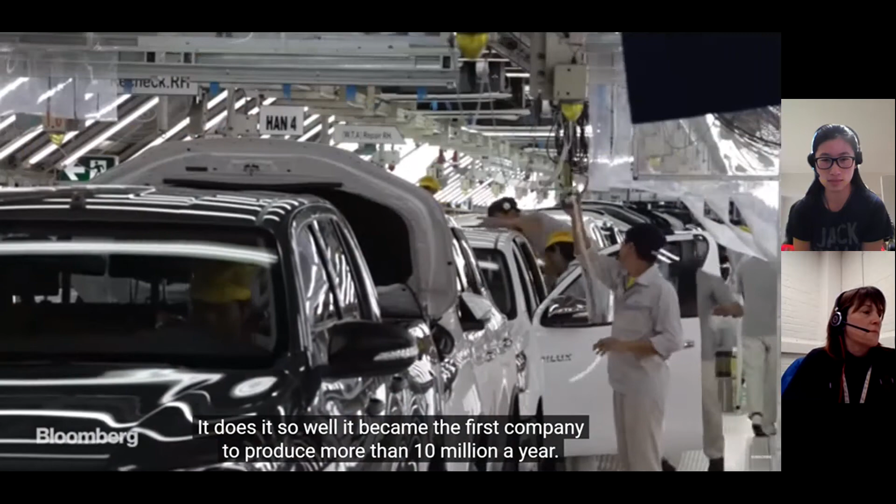Toyota knows how to make cars. It does it so well, it became the first company to produce more than 10 million a year. Its success is rooted in a special system and began what's now known as lean manufacturing, an ethos emulated by companies around the world to make products faster, cheaper and better. Here's how Toyota changed the way we make things.

Following the Second World War, Japan was left in a precarious economic position. Steel and other metals were scarce. Already disadvantaged by lacking natural resources, materials were hard to come by, and companies had to be creative to compete. Toyota's founder, Sakichi Toyoda, had started a loom business, but it was his son Kiichiro who founded the motor company in 1937. They were used to working within narrow margins.

As the shortage of materials increased during the war, the number of headlamps on its Model K truck was reduced to one, and it only had brakes on one of the axles.

The turning point for Toyota's production system would come in the early 50s, when Kiichiro's cousin Eiji would travel to the US with a veteran loom machinist, Taiichi Ohno. They visited Ford's River Rouge plant in Michigan and were impressed by the scale of the operation, but knew that in cash-strapped Japan, companies didn't have the resources for such a system. Having months' worth of stock sitting in a warehouse would tie up precious capital they didn't have.

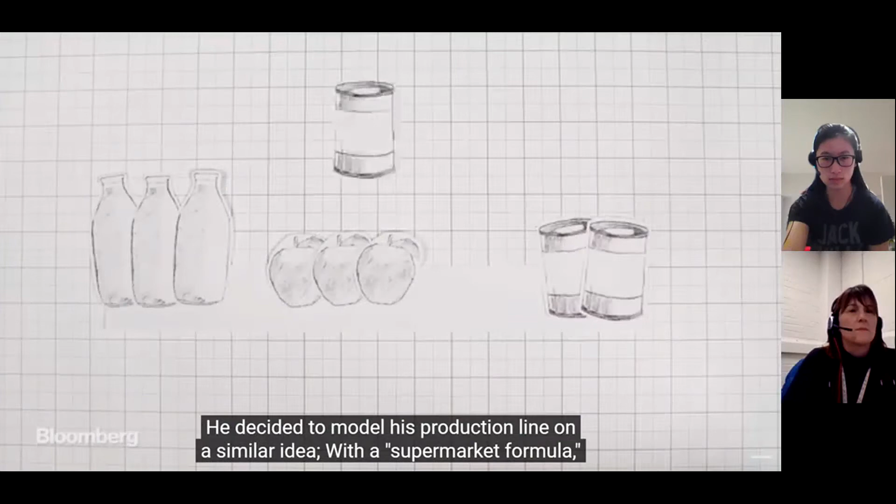Instead, what truly impressed Ohno was a visit to a supermarket, a Piggly Wiggly, according to legend. Japan didn't really have self-service stores at this point, and he was struck by the way customers could choose exactly what they wanted, when they wanted. He decided to model his production line on a similar idea. With the supermarket formula, only enough parts were produced in the first phase to replace what was used in the second, and so on. This is where the just-in-time system really took shape.

Toyota was able to eliminate much of the waste in Ford's system, making smaller numbers of parts to be used when it needed them, allowing the company to operate on a tighter budget. As part of this, Ohno developed Kanban, a sign-based scheduling method which shows goods in production and goods out. It's now seen as a precursor to barcodes.

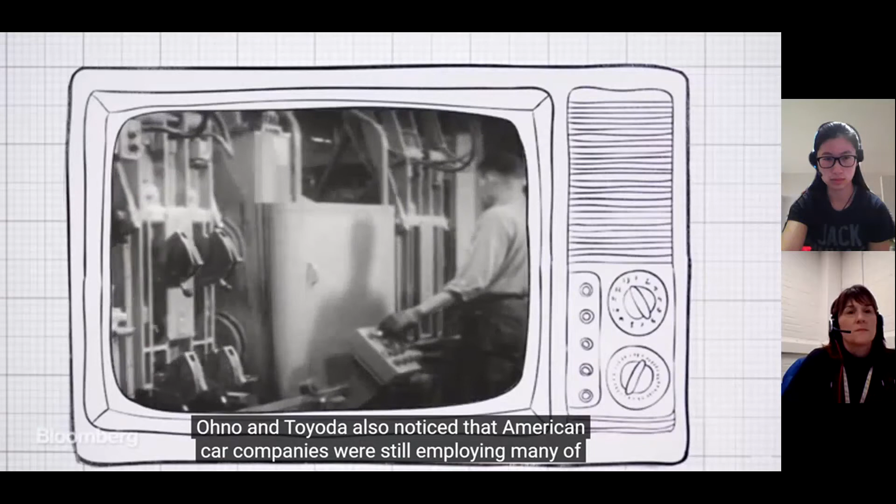Ohno and Toyoda also noticed that American car companies were still employing many of Henry Ford's early production techniques. They kept operations at full tilt in order to maximize efficiencies of scale, but then had to repair defective cars after they rolled off the line.

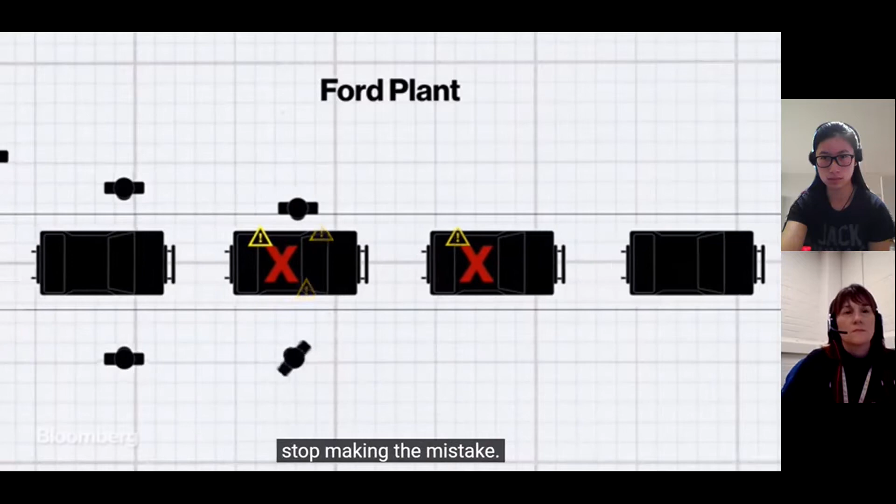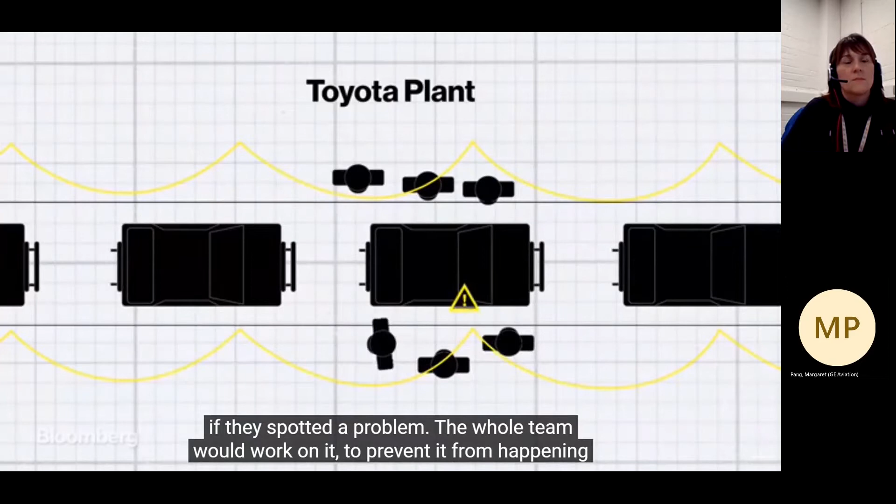Ohno believed this caused more problems and didn't encourage workers or machines to stop making the mistake. So he placed a cord above every station which any worker could pull to stop the entire assembly if they spotted a problem. The whole team would work on it to prevent it from happening again. As teams identified more problems, the number of errors began to drop dramatically.

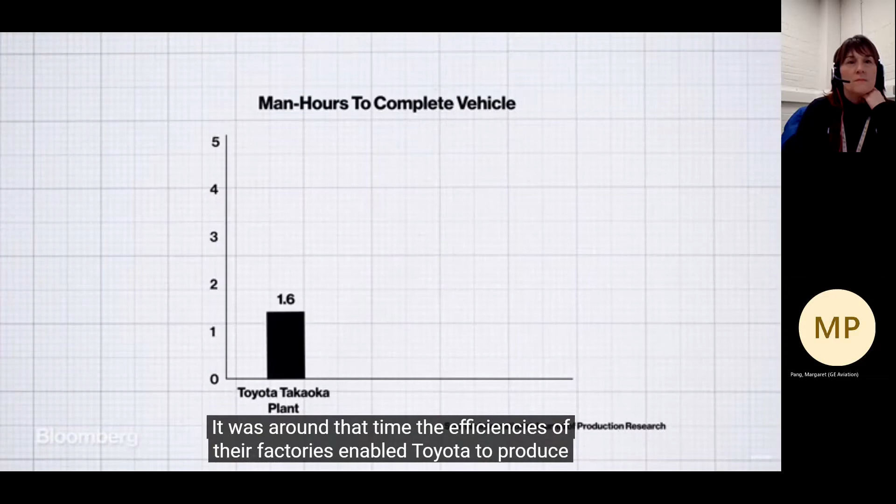Combined with a culture of continuous incremental improvement called Kaizen, the Toyota production system built a brand known for making reliable and affordable cars. But Toyota was also getting good at producing cars quickly. In 1962, the company had produced 1 million vehicles. By 1972, they'd produced 10 million. It was around that time that the efficiencies of their factories enabled Toyota to produce a car every 1.6 man-hours, much lower than their competitors in the US, Sweden and Germany.

And as the oil crises of the decade sent gas prices higher, cheap-to-run Japanese cars became much more appealing to Americans, whose powerful but gas-guzzling vehicles suddenly became very expensive to run. Today, Toyota has made over 250 million vehicles.

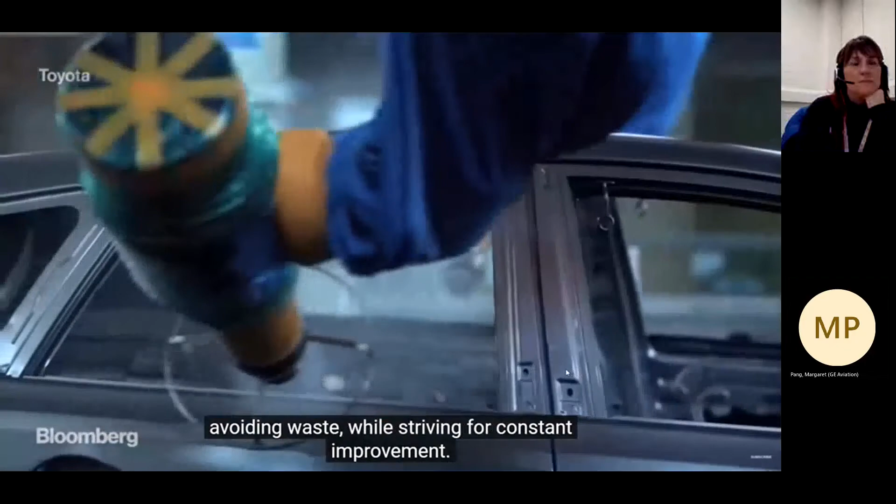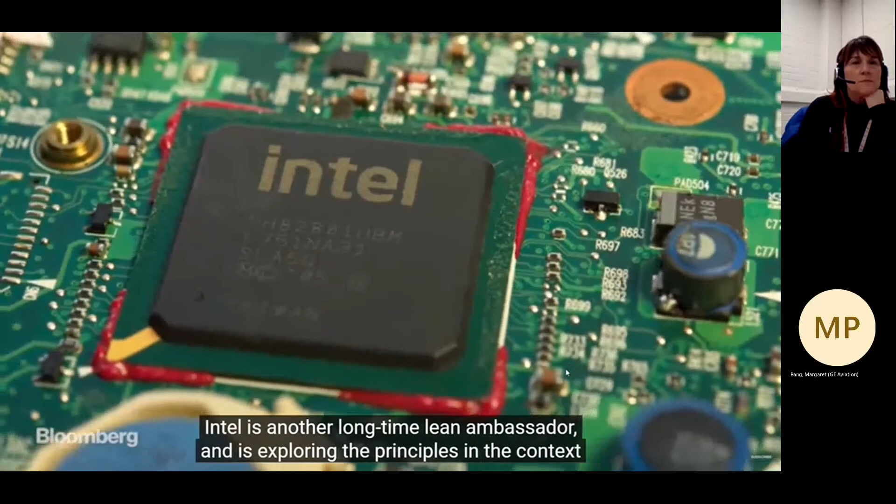Others have looked to them to learn the lessons of lean, combining craft with mass production, avoiding waste while striving for constant improvement. Boeing is perhaps the most famous, restructuring a plant to better suit TPS. Intel is another long-time lean ambassador and is exploring the principles in the context of AI and the Internet of Things. A Canadian hospital even used Toyota's system to decrease wait times in its ER.

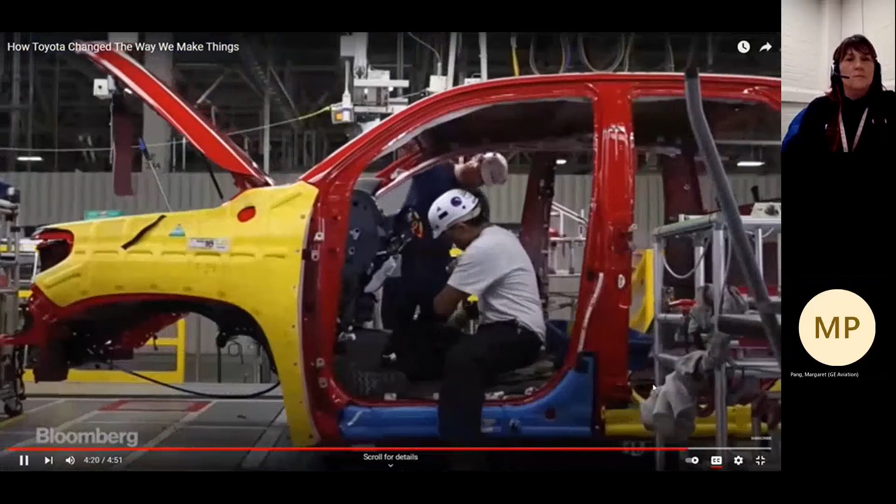The Toyota production system changed not just how cars are made globally, but how we approach making things, full stop. It also showed that there's always a better way to make a product.

I hope that video explains where the history of lean came from, and it's really simple. It's just trying to improve basic tasks and make them as simple, quick, and efficient as possible, but still keeping quality. That's really my role at Caledonian, within the repair system, trying to reduce the time it takes to repair parts on aircraft engines, and do it as cost effectively as possible. So that's all lean is trying to do.

There's another video to follow. This basically shows you a live example of lean within a site in GE, General Electric. I think this site's in the US. It talks you through a live process of where they've looked at it, tried to improve it, and the positive impact it's had on employees. It's maybe a wee bit heavy, but it's a good example of lean being used in an industrial situation.

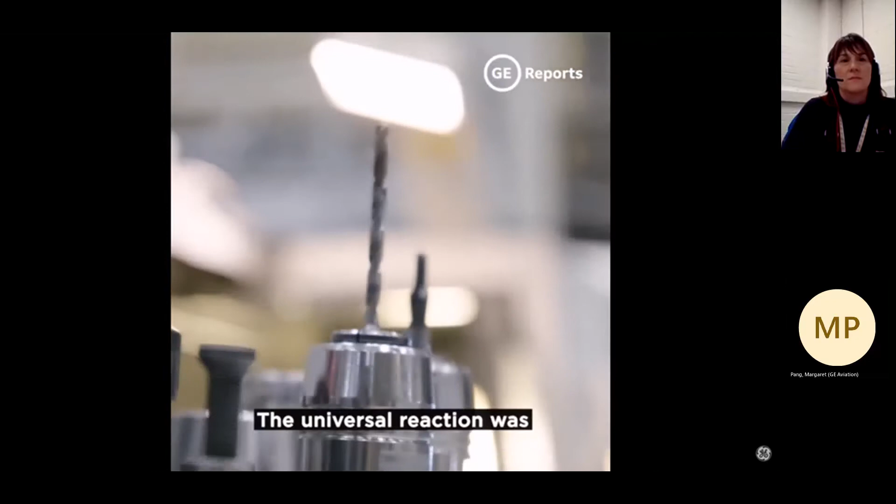In late summer, early fall of 2017, the team started to run into trouble. We had the waste of inventory, the waste of overproduction. The universal reaction was, we have to fix that.

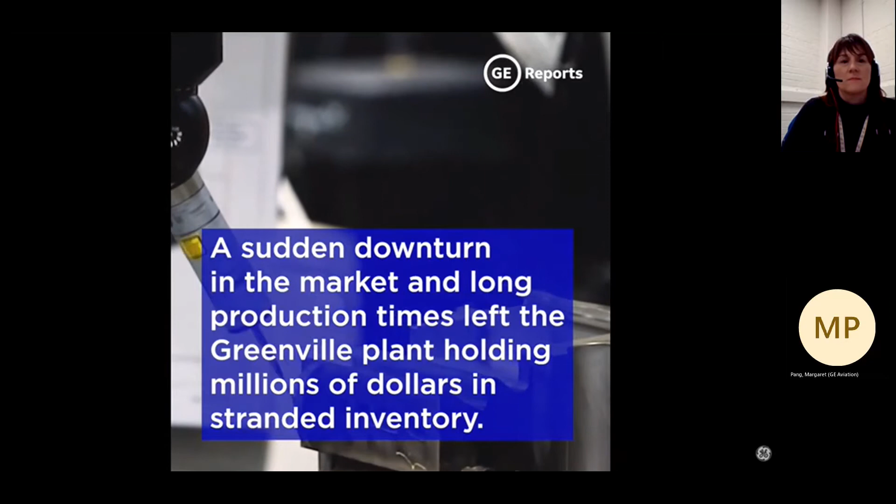When you start to do lean, simply put, it's find a problem, fix a problem, keep it from coming back.

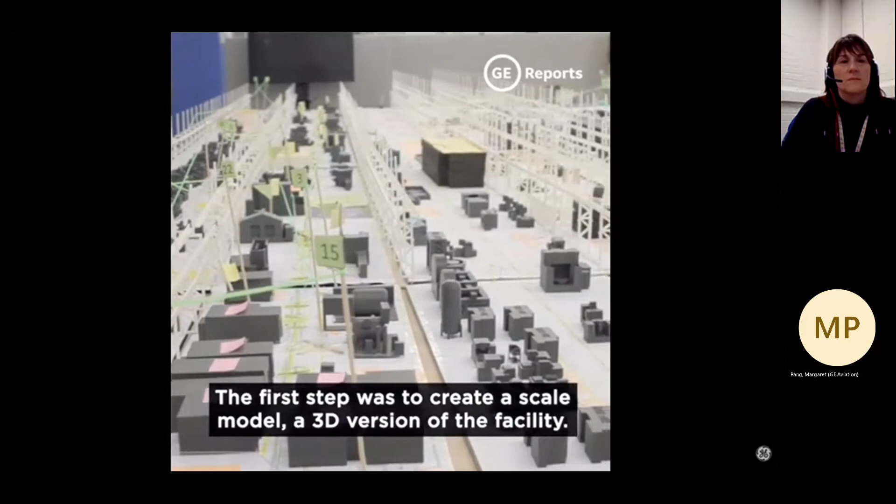The first step was to create a scale model, a 3D version of the facility. This helped us understand from a bird's eye perspective where the machines were situated and how the parts traveled around the facility. We pegged yarn from process to process, and if you trace the steps of the part, it traveled 3 miles.

We had to take the machines from where they were in a haphazard fashion and organize them so the process points are next to each other. Then it's a matter of making what we call a line, getting those process steps next to each other in a certain configuration. This is the old way we used to do things.

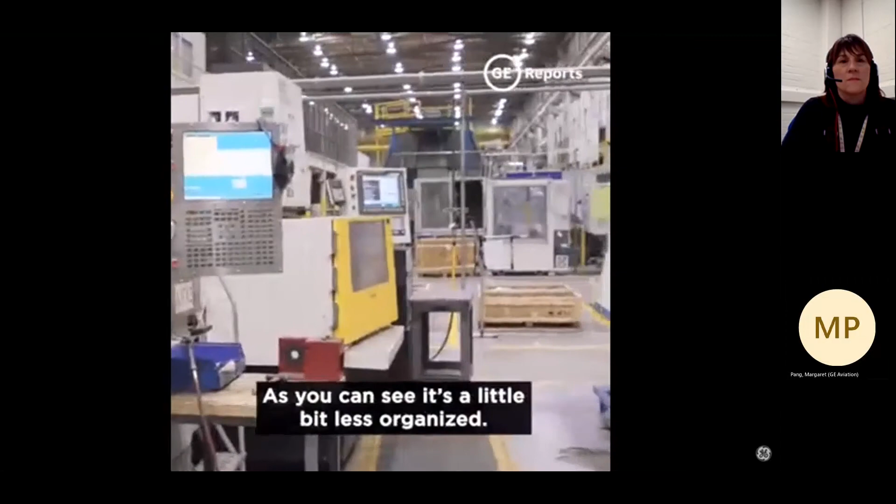As you can see, it's a little less organized. Our beginning operations are over here, then you go all the way over there. There's no clear material flow, so you can't tell if you're ahead or behind schedule.

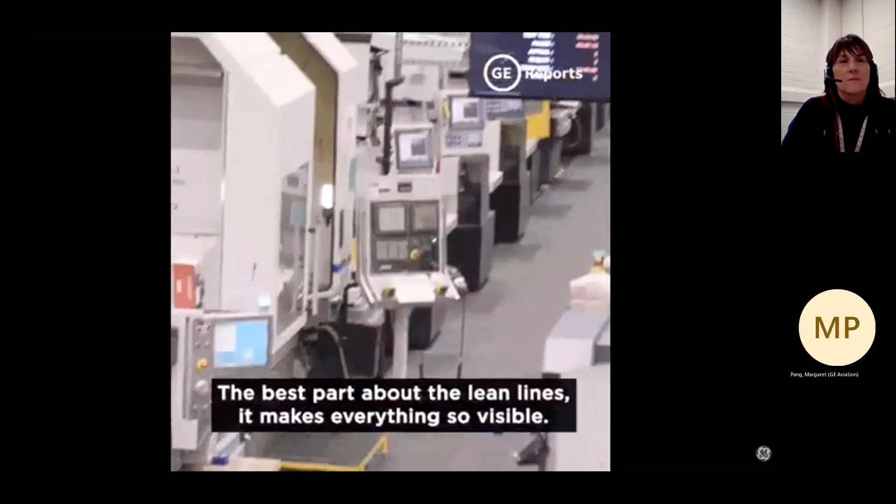The best part about the lean lines is it makes everything so visible. The line is clean, efficient, and organized, and you can tell everything is running to schedule with a quick glance. When we set the line up, we went from 3 miles to 165 feet.

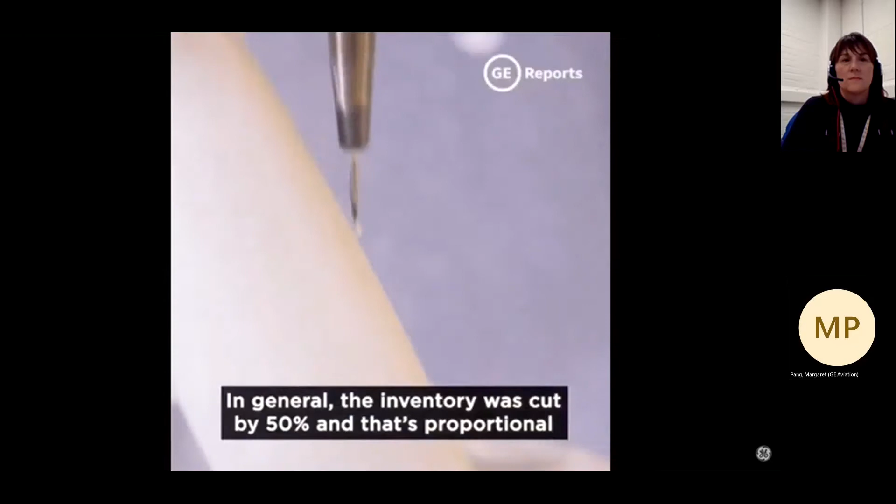The bucket lead time went from 85 days to 49 days. In general, the inventory was cut by 50%, proportional to the lead time reduction. The business impact is very significant.

The purpose of the line is to expose problems. It's a forcing function to expose problems. It's so important to have a desk right on the shop floor, to actually sit right here, because you can instantly respond to the problems the line is having.

It's a big change for us. We're on the line, troubleshooting, solving the problems. They press the button, I see there's an issue, and I can immediately respond, let them know if we need to write up a non-conformance, or if we need engineering support. Everything's immediate, real time, on the line.

When you start to do lean, you need everybody to understand the way forward. We did 6 week-long action workouts last year, creating an environment that could embrace lean. It really helps the team think differently about how to run a shop, eliminate waste, and set up a line, you name it. That's how we grew the core group of folks with experience and knowledge working with all the different lean toolkits.

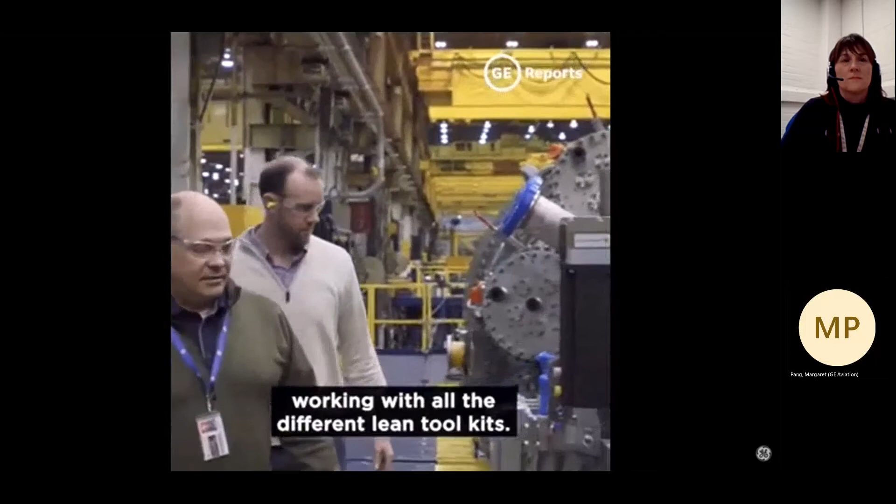Lean is all about eliminating waste. Almost every category of waste we addressed when we started to make that line. What lean's really getting me to is the thought process of continuous improvement. Where am I at today? What am I doing better tomorrow in order to continue that journey? There's no end game to it. It's a continual journey to learn.

So that's an example in one of our sites, and I hope you can understand what they were trying to achieve. The parts were moving 3 miles at one point until they changed it, and now it's like 100 yards, which is a significant reduction. It's just simple things like that you think, oh, I don't mind walking along here to get this, then go over here. But when you calculate it up, it can really amount to a lot of time and travel. So that's really all that team was looking at, is how far parts travelled and how to reduce that.

So for me, the thing you always think about when you think about lean is what is value. Value is what we'll hear throughout this session. Value is simply what the customer is willing to pay for, and everything else apart from that is complete waste. So think about it, you being the customer, running your day-to-day life of getting things ready for school or college, or going to play tennis or running. Think of each task you do, and is it adding value to you getting to school or your sports class.

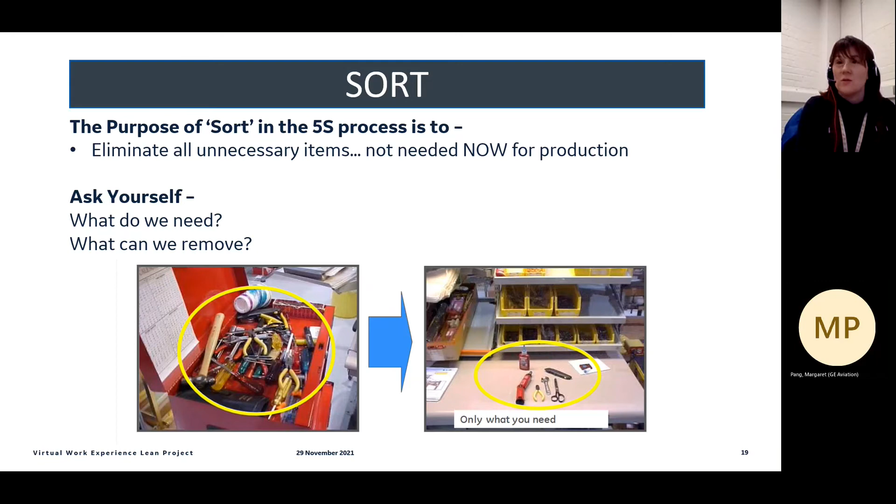So this is us then trying to introduce sort. If you were to eliminate the unnecessary items from the ones that you need - we asked you to find the numbers between 1 and 49, and I know there's numbers between 50 and 90 in there. So if they were removed, would you be able to find the numbers 1 to 49 much easier? I think you would. So that's what sort's all about - just remove what you don't need from what you do.

Okay, so the same rules apply in the next round. Still, the aim of the 20-second shift is to find the numbers between 1 and 49, and see if you can make an improvement on the numbers you got in the last round. So think about them and see if you made a change.

Ten seconds to go. And that's your second shift up.

So did anybody get any improvements? Did you get a higher number than you got before? Please discuss within your group if you did, and who got the highest mark. Hopefully you found that a little easier to find numbers between 1 and 49.

So the next one is set in order. Try to use your imagination, but we've installed some racking in my numbers. Number 1 is located in the bottom left-hand corner, 2 is in the rack up, 3 is in the rack up from that, 4 is in the middle bottom rack. Try and find - there is an order in how the numbers sit. Once you know that order, you should then be able to find your numbers a lot quicker.

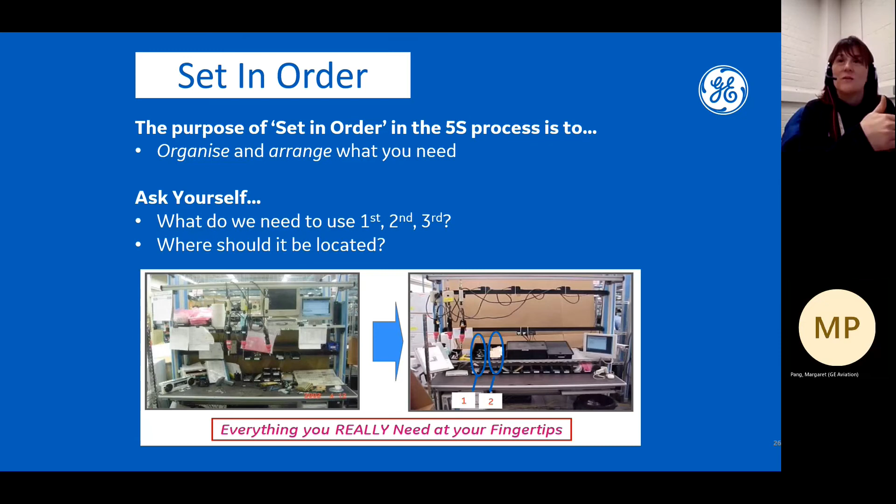That's what we do building engines, stripping engines and cleaning them. We think about what fixtures we need, what tooling we need, what chemicals we need and when, and just have that all lined up so it makes it a much smoother process.

Okay, so the next step is standardise. We'll ignore the shine because we can't do any cleaning during this game, but clean your rooms, clean your kitchen, that sort of thing. We would be asking the guys to clean their areas.

So in the next phase we've rearranged the numbers in a standard way that makes the completion of the work task as easy as possible. Same rules apply.

A 20-second shift will start as soon as the next slide appears. Shout out to your classmates when you've got to 49. I'm thinking you might be there already, but I'll give you the full 20 seconds just in case.

Fantastic, I hope everybody got to 49. A lot of people have said in this game that even if you made the font and the size the same, that would be a next level of improving that. I know they're all in order, but making everything uniform would be even better. So compare yourself now to where you were on your first round.

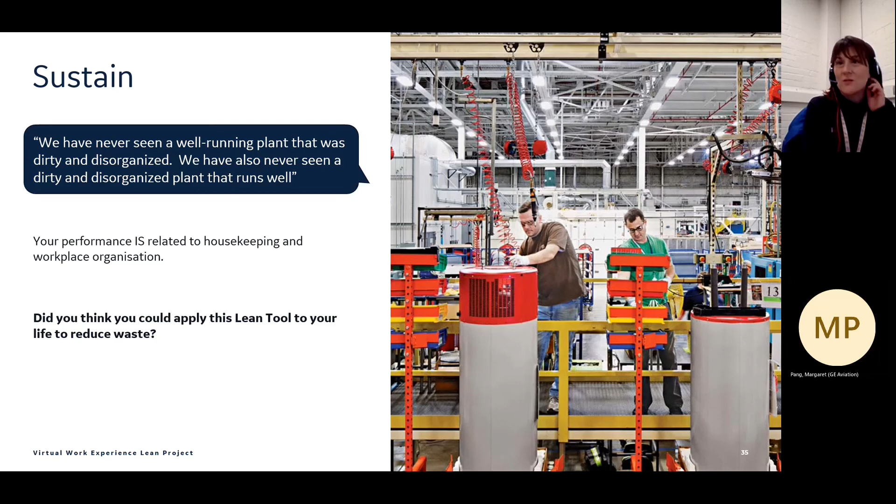So hence, think about your project, this is what we're trying to achieve. I would really like to see part of your project, one room or one area, one cupboard or one wardrobe, where you've applied 5S to it. It would be a really good exercise to do, and good learning, and hopefully you see the benefits of it. So think about that when you're trying to reduce your waste in your morning.

You can pause and discuss within your group, but where have you seen examples of 5S within your home? A really good one that most people have is their cutlery drawer in the kitchen, where forks, spoons and knives have got their own area. Most people have their washing machine and tumble dryer next to each other, which makes it that much easier. A kitchen's a good place to look, pots and pans are usually all together, you don't have one pot in one cupboard and one in another. So have a look around and see where you see 5S and things that should be together, making life that much easier for you.

So just to finish, I want to show this video on Formula One, just to help you see how 5S, lean production or lean tools have progressed. It's continuous improvement, not something you do once and never look at again. My job is to continually review the process and see how we can make it better. If Formula One had taken the attitude that they're as fast as they can in a pit stop and hadn't changed since 1950, this video is from around then, you can see how far behind some teams would have been if they didn't look at it with a lean mindset.